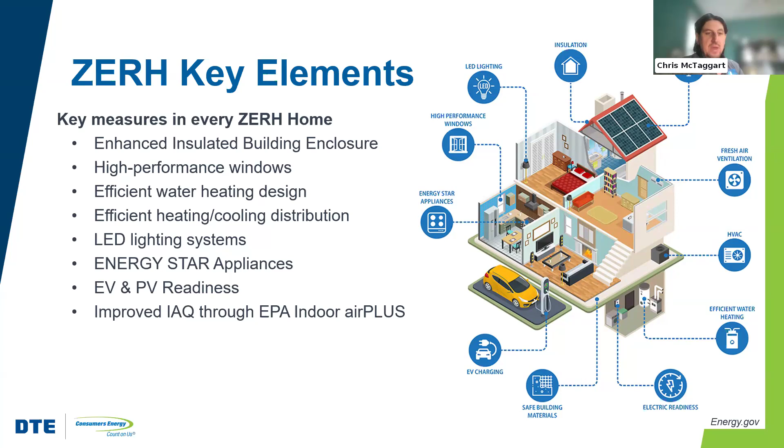The program has mandatory requirements, which are the checklist elements that have to be met. So, for example, you have to have Energy Star appliances. It's not an option not to. You have to be set up to be PV ready. It's not an option not to, because those are what are called mandatory requirements. And then there is basically the ability to demonstrate compliance using performance methodologies focused on the Energy Rating Index score, aka the HERS Index score. And all of these elements are verified by program verifiers, and that's what gives us certification.

It's important to note, as we talked about last week, that to be a DOE compliant home, you have to also be compliant with the Energy Star homes program, as well as EPA's Indoor Air Plus. So really, by being a DOE efficient home, you are the combination of all 3 of those badges.

So again, this is just another way to look at the value proposition. We optimize efficiency first with better building enclosure, more focused HVAC equipment and water heating equipment, and really good quality lighting and appliances. So that optimizes our efficiency. Basically, at that point, it's hard to do a whole lot better in terms of saving energy. The Indoor Air Plus program has some specific water management requirements as well as indoor air quality elements. The program overall builds in more optimized comfort because of some of the equipment and envelope specifications.

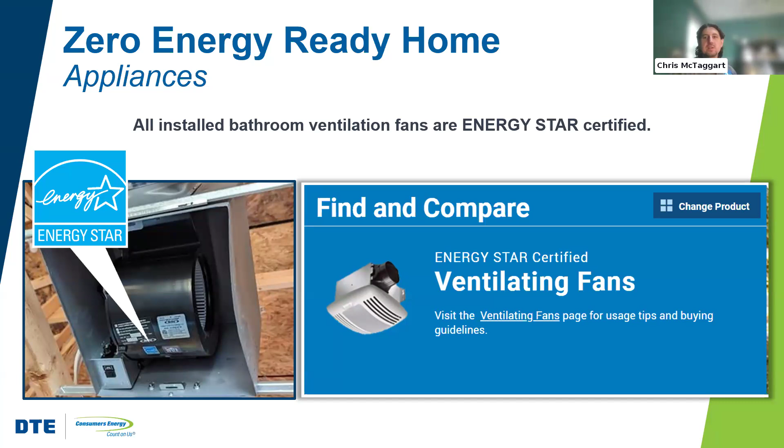Indoor air quality. So speaking of bath fans, obviously bath fans are used for a couple different things. They help to reduce moisture in our homes. They can also be used as a whole house ventilation system to bring in outdoor fresh air. They can also help to remove odors from the house. So bath fans are part of an air quality solution, but they're not the whole thing.

And even whole house ventilation or local mechanical exhaust, those are not by themselves adequate for ensuring good indoor air quality. This is why the EPA created the Indoor Air Plus program, which is an additional badge that can be added onto Energy Star homes, but is a mandatory element of Zero Energy Ready homes. In order to be Zero Energy Ready homes, or the DOE program rather, you have to certify to EPA's Indoor Air Plus.

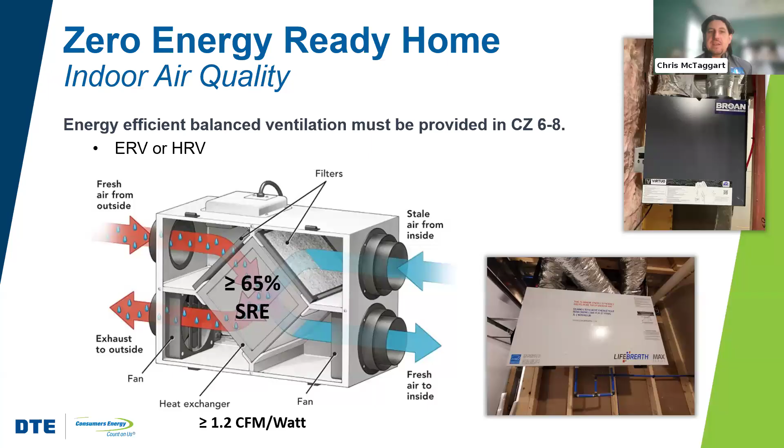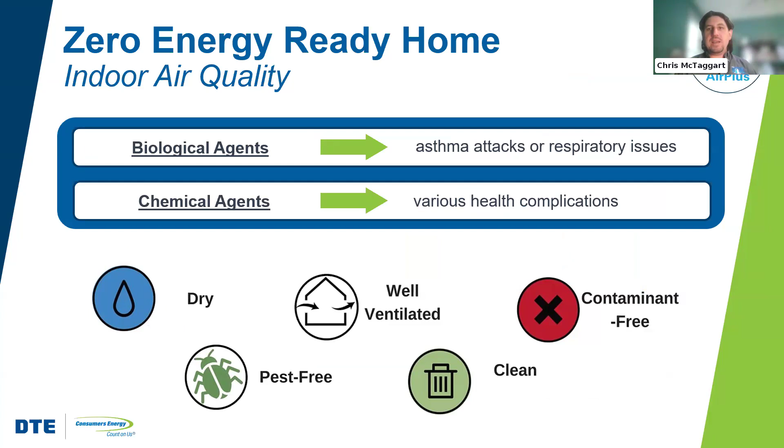Again, if you feel like that was too broad and non-specific of a review of the indoor air quality provisions of the EPA's Indoor Air Plus program, don't worry. We're going to be going over it more in detail next week so that you get really a big picture, especially diving into the details of what makes version 1 different from version 2.

Okay, so getting into the next component here of the program, zero energy ready homes no longer. Now the DOE efficient homes program still has renewable ready provisions. Believe it or not, when I got that email from the DOE, I sure as heck figured that any reference to renewables would have been taken out of the program, but that is not the case. The program still has renewable ready provisions.

So what does renewable ready mean? Does it mean that you have to put solar on the building? No, it doesn't. So this is a big thing that I think people have gotten wrong about the program, and maybe why the DOE has chosen to rebrand is that it's a little bit confusing. Consumers don't know the difference between zero ready versus net zero.

And I've heard a lot of builders and architects and even homeowners say, yeah, I want to do that DOE program because I'm going to get net zero out of it. I'm like, well, pump the brakes. You're not necessarily going to get all the way to zero just by being a zero energy ready home. And even if you are, you're still not going to get there.

Even if you added solar, I think this might be part of the motivation with the DOE changing the brand name because, as it is, if you have a minimally compliant DOE home in Michigan, you can't necessarily just add solar panels and be good to go. But solar is the next step, and I appreciate the DOE has maintained this in the program.

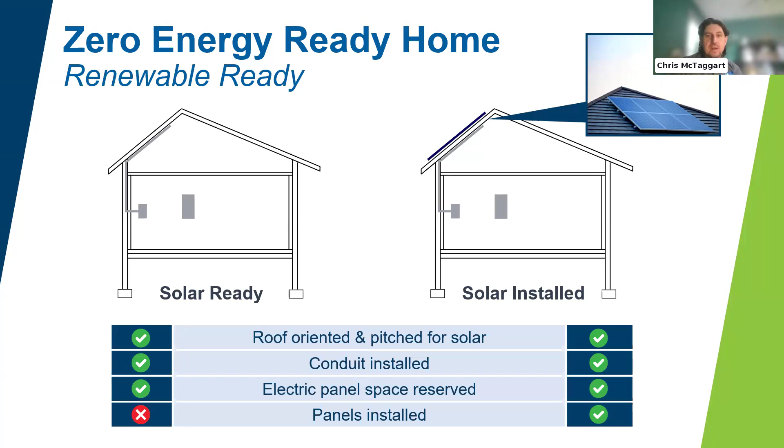So again, why would we do any of this? Why would we set up homes to accommodate this? Well, because once you have a home that is so efficient, there's a certain breaking point where you can't add much more insulation. You can't make it that much more airtight to really derive a lot of value. At least that's DOE's perspective. In a couple more weeks, we're going to talk about the Passive House program, and Passive House thinks a little bit differently. They think that there's still more juice to squeeze out of the lemon.

But regardless, you get to a certain point of home efficiency, and the home's never going to be any better than that. The only next measure is to add on-site renewable power so that you can basically have the homeowner provide some of their own on-site renewable power to offset their energy bills. Makes a lot of sense.

Solar panels aren't the only way to do renewable energy, but certainly they're the most popular way. Typically, they're done on a rooftop. They could be done on a ground-mounted configuration as well. It converts DC power to alternating current using an inverter system.

And you can actually connect them to batteries too, so that the homeowner potentially has backup storage in case the power goes out, or if they want to take advantage of storing the energy on site so that when the sun goes down, they can continue to use it. There's also opportunities for potentially on-demand pricing through the utility that can really help to save more energy over time.

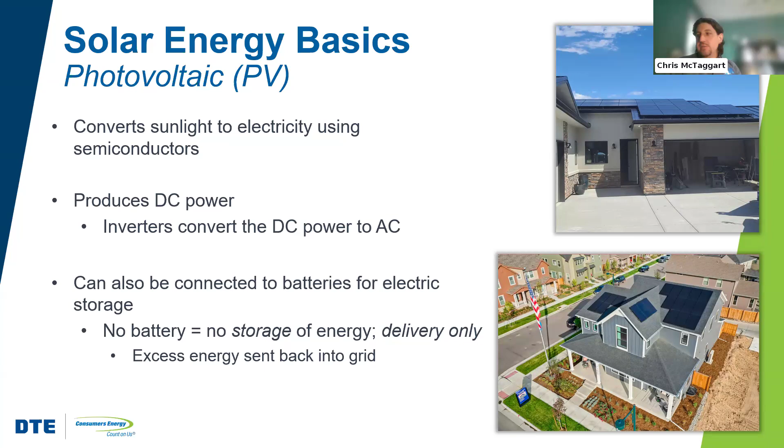Again, we talked about it back several weeks ago, but you can have a roof-mounted versus a ground-mounted system. I'd say most suburban developments, it's going to be pretty hard to get a really good ground-mounted system, just because most people don't have enough land to devote to ground-mounted applications. So I'd say the most common way that people go about adding solar panels in residential is using roof-mounted types of systems.

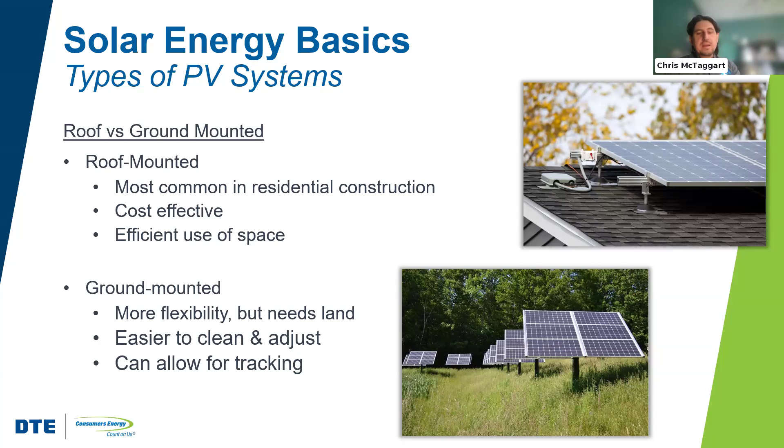You want to provide what that load is going to be. So, if you're doing a ground mount system, it doesn't matter. Basically, we're not worried about adding more weight to the roof. But solar panels don't weigh all that much, but they weigh something, and so we have to make sure that there is adequate support on a roof for that.

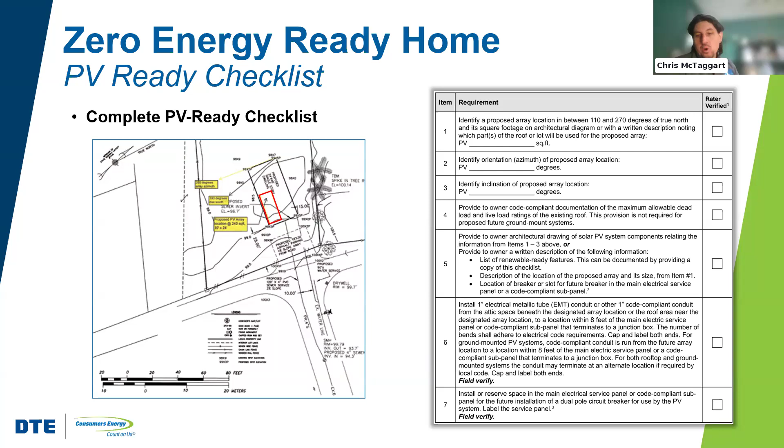Then we have to have in our drawings the specific renewable ready features that are to be installed, as well as a potential future array that could be installed. And then you have a conduit that is field verified to have been installed up to the roof, as well as a space in the electrical panel for a future solar system to be installed.

So, again, we want to make sure that there is enough consideration for the extra weight of the solar. We want to figure out where that's located and what its orientation and inclination is. We want to verify that conduit is running from the electrical panel up to the roof. And then we want to make sure that there is a circuit breaker dedicated to a future solar system.

So none of these things are necessarily standard, right? They're also not very expensive. It's not very expensive to set up a home to be renewable ready. It's more about thought that has to go into it.

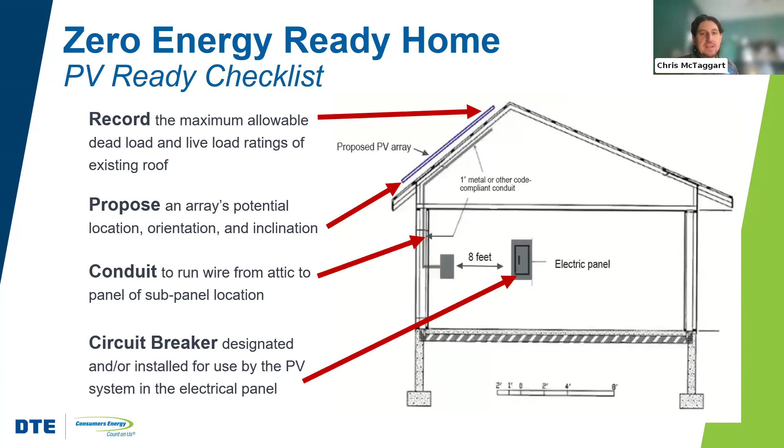We mentioned that there are some exceptions. So one exception we didn't talk about is what happens if the building or community already has PV. So let's say that you're building houses in a subdivision and there's already a master community renewable system. That happens particularly in DTE territory. Ann Arbor has a couple of solar powered communities where they have whole community solar panel arrays. Well, in that case, you don't have to worry about setting up the house to be PV ready.

Again, I talked about my example of where you are in an urban environment and totally shaded by the adjacent building, or you're in the woods and you're totally shaded. So again, sometimes certain homes are just not going to be worth doing. If you lack 500 square feet of roof area in a way that's going to allow you to add solar panels that make sense, then they're not going to make you do it.

So you have a diagram here that shows you, if you have east and west and you can add 500 there, that's okay. If you've got northwest southeast orientation, that could work. Northeast southwest, that could work. North and south, that could work. But again, it all comes down to the amount of square footage of area. So if for whatever reason you don't have enough square footage in those areas, between those degrees of horizon, then ultimately you're not going to be required to do it.

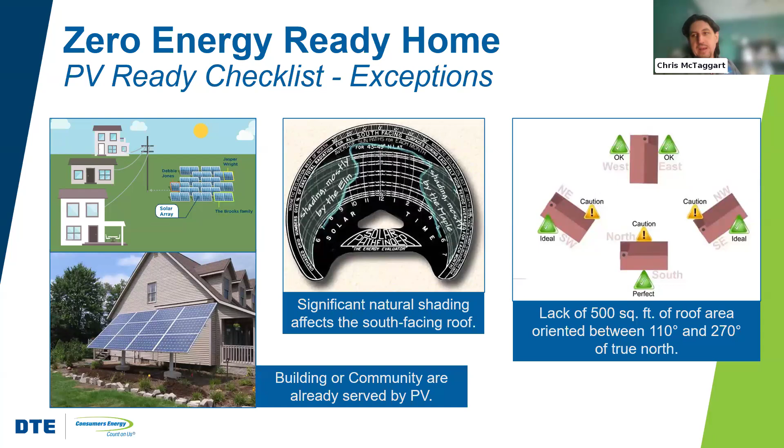That's pretty good, actually. But is that enough to make every home net zero? Not necessarily. If you have a very large home, probably not. Even if it's an efficient home, that's still probably not enough necessarily. Now, that's not to say that that's the limit. If you have 1,000 square foot roof area, you could add double that amount of size of panels possibly.

Regardless, the point is that we're giving people the provision to offset their bills further at some point in the future using on-site renewable power. That's the point.

EV readiness. So, as you all are probably aware, electric vehicles are now more prominent in terms of a selection for consumers. And so we would like to give people the opportunity to charge at home. That's one of the value propositions of EVs, is that you don't have to go to the gas station. You can just charge your vehicle at home, and that whole part of your life, you never even have to think about it anymore.

So again, you don't have to install an EV car charger. That is not required. What you do have to do is, assuming that there's at least a parking space or a dedicated garage. If you don't have either of those things, then you have to comply with the ZERH multifamily provisions if there's shared parking. If for whatever reason there's zero parking, well, that's a whole other thing, and I guess you don't have to follow these requirements, right?

Especially here in Michigan. I'm here in Detroit, Motor City. Guess what? We like to drive, so most people are going to have at least a parking spot in their driveway, or a dedicated parking spot, or if not, a garage itself. You have to have a 240 volt, 30 amp receptacle within 6 feet of the driveway or in the garage. And then you have to have a branch in the panel for EV charging.

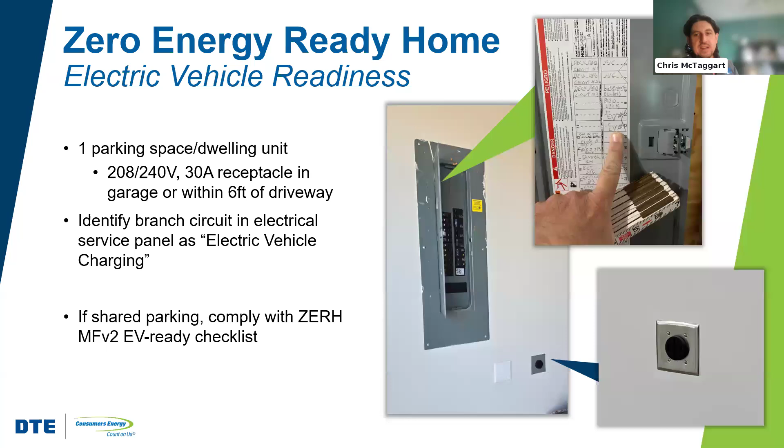Look, we don't know what the future is. And there's a good chance that the technology will continue to improve and it becomes a no-brainer. And in 10 years from now, everybody is driving an EV because it's just very cost and life efficient for us. We'll see what ends up happening, but the requirement of the program is set up a place in the panel for an extra 240 volt run, as well as sending a receptacle to a place where someone can charge.

Heat pump readiness. Okay, so again, does ZERH require us to have heat pumps? The answer is no. It does not require electrification. You can, in fact, install a fuel-fired furnace or boiler or a fuel-fired water heater. There's no prohibition within the Zero Energy Ready Homes, now the DOE Efficient Homes program, for fuel-fired heating, water heating, cooking, clothes dryers, none of it. There's no prohibition for any of those elements. You can, in fact, use fuels for any of those things and still be certified.

But you have to set up the home for a future where heat pumps may make more sense. So for heat pump water heater readiness, you have to have an individual branch circuit within 3 feet of the water heater. And there has to be space within the home or garage that is a certain size, or within 3 feet of a fossil fuel water heater for the future application of a heat pump water heater.

What's the logic here? Well, the logic here is heat pump water heaters continue to get more efficient. And so at a certain point, it's going to be a no-brainer for people to install them. But how you install them is important, especially in a cold climate. They can potentially chill a room in excess and potentially cause condensation issues. So that's why they're specifying a specific kind of space that a heat pump water heater can be installed.

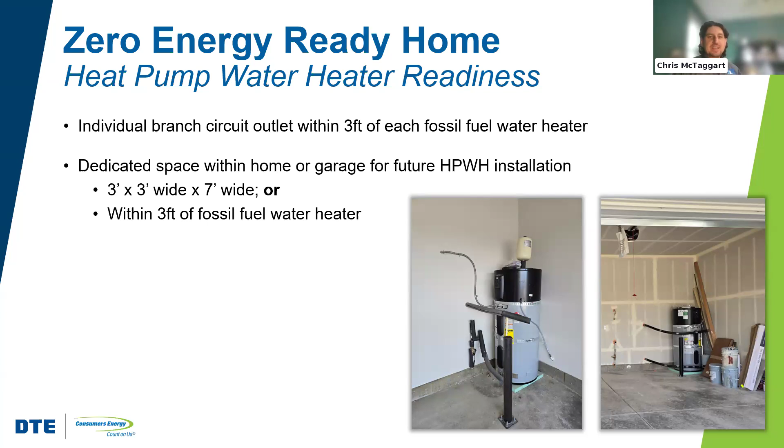But if you were down south in Alabama, sure, it might make sense to put your water heater in the garage because it really doesn't get that cold. And heat pump water heaters take out hot, humid air from inside the home, and they're actually kind of like a form of an air conditioner. They actually will reduce moisture within a zone, as well as provide a little bit of free cooling. So it makes sense to potentially put a heat pump water heater in a garage in a location like that. Less so in Michigan.

For space heating, again, you have to have an individual branch circuit or conduit installed for the future wiring installation of a heat pump. All right, so I'm going to give you a little bit of the backstory on why this is kind of a nothing burger requirement. Almost every home today in Michigan has air conditioning installed, or at least the provision for air conditioning to be installed. Those require a 240-volt circuit. A heat pump also requires a 240-volt circuit.

Heat pumps are air conditioners, or rather, air conditioners are heat pumps. Sometimes people actually refer to heat pumps as two-way ACs. They run in heating mode and in cooling mode. So this is kind of a silly requirement because almost every single home already has AC. So you could just say, put the circuit that is for AC, and you could put in parentheses "for future heat pump." And that would be setting it up to be compliant with the program.

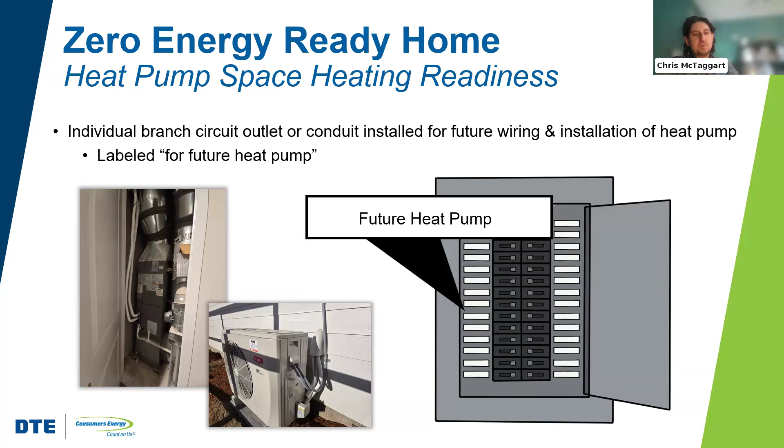Where I guess this wouldn't work out so well would be if you had a boiler. If you had a fuel-fired boiler for space heat and no air conditioning, then technically you would still have to add a provision for a future heat pump. I think that's a pretty rare example. Perhaps some places up north still might do something like that, but I think most people want the provision for air conditioning at this point.

Okay, ended a few minutes early. We got through all those additional supplemental requirements and really learned that those additional requirements are pretty straightforward. They don't add a lot of cost. We have LED lighting and Energy Star appliances, not a big deal. The Energy Star bath fans, that's a little bit of a premium. That's not necessarily something that's standard. Indoor Air Plus, I would say, doesn't add a lot of cost, but it adds a lot of value.

And I'm excited next week to be able to go over the value proposition of Indoor Air Plus in more detail. And then besides that, there's a lot of readiness provisions. Heat pump readiness, again, that's kind of a nothing burger. PV readiness, that's a little bit more to consider. EV readiness, again, it's an extra outlet. There's a chance that the builder has to consider upsizing their panel for some of these extra circuits, and I would say that's maybe where the cost comes in. But you're also giving a person a future ready home, and that adds a lot of value.

The homeowner could in the future choose to add a heat pump. They could choose to add a heat pump water heater. They could choose to add EV charging, and they could choose to add on-site renewable power. I think that adds a lot of value of future readiness.